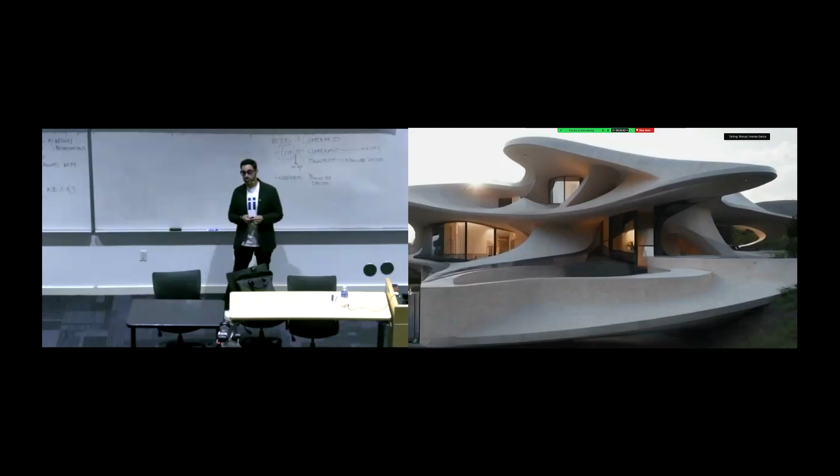Good. Okay, so I'm gonna start back in the 2000s when Greg Lynn, followed by others, started to talk about digital architecture, an architecture that could be organic, that could be controlled by other factors, that could be constantly evolving. Just 1 second. In these 25 years, a lot happened, and we evolved in parametricism, in digital design, in digital fabrication, etc. Up to the point that we have generated enough data on what we call digital architecture that right now we can ask Runway to interpret what the embryological house by Greg Lynn would be if made today. And it can already get a pretty good approximation of how it would look.

I would like to select a few slices of the people that, at least for my own research, have been fundamental during these 25 years, and perhaps even longer. Perhaps it starts with rethinking the way we design with visionary designers like Joe Colombo or Luigi Colani, and how these forms and textures and this way of understanding design and architecture have evolved with the introduction of digital fabrication, robotics, automation, and 3D printing. With special attention to these two people, Miguel Fisac and Jean Prouvé, who understood architecture differently.

They understood architecture as a product, and they wanted to take every single step in the design to production chain. So they were not only designing, but also conceiving those pieces as something that they could fabricate. They would set up factories for it. They would even be in charge of the logistics and the operations behind selling an object that could become a piece of architecture like this Maison Tropicale. They were relying, though, on centralized manufacturing and long-range shipping. What if they lived today?

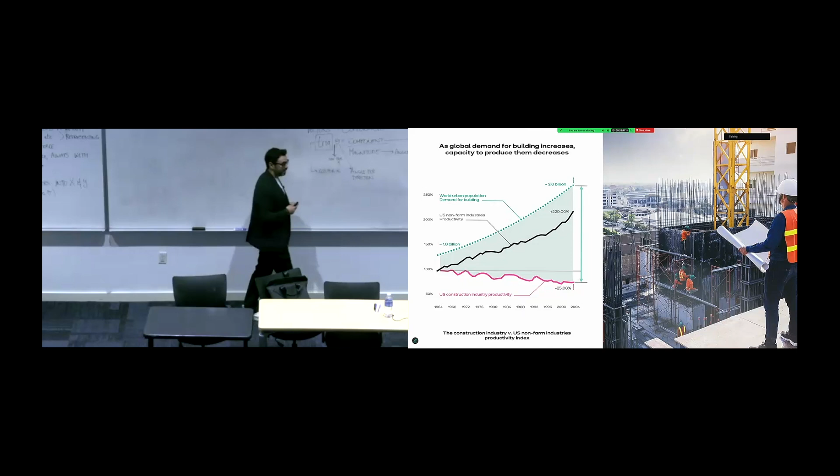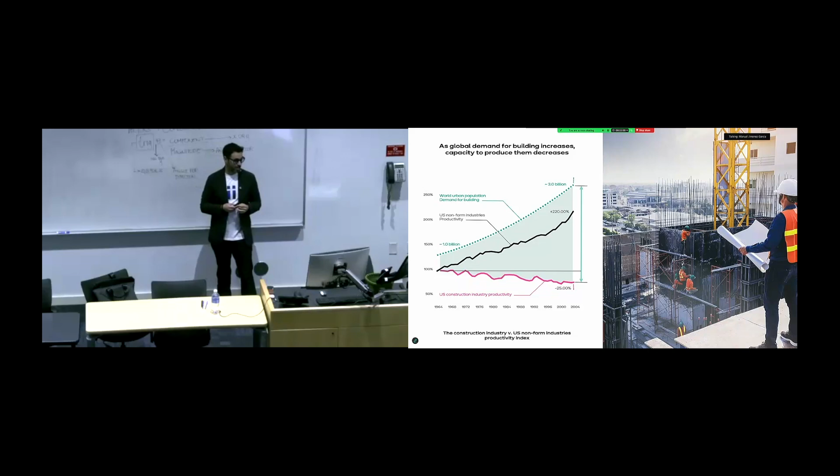You see in this graph the digitalization of different disciplines. In fact, it's not in this one, but construction and architecture is one of the least digitized industries, right after hunting and agriculture. I don't think they are taking into account agriculture in the East because it's highly digitized, and obviously it would not be fun to digitize hunting. At the same time, we urgently need to produce more and more housing to house an ever-growing population. And our productivity is magically going down. That's the curve that you see, the pink one.

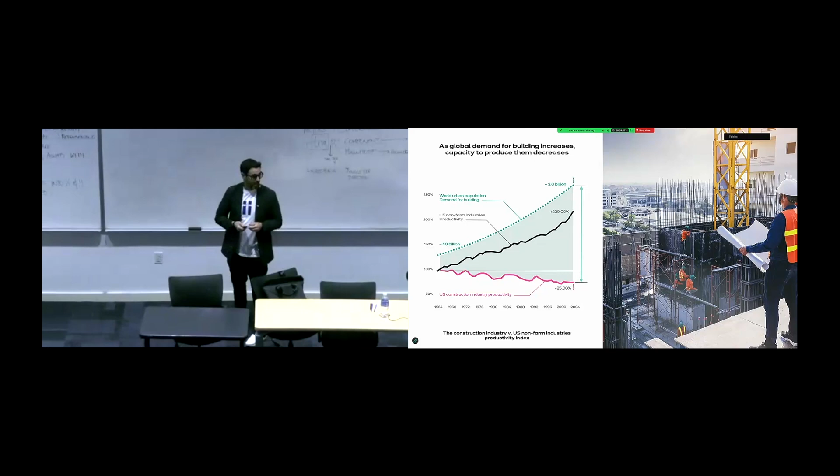Architecture and construction is still an incredibly long and wasteful process. So how can we rethink that? And perhaps we've been rethinking everything we do, right? With every tool that was in hands at that time. Now we're talking a lot about AI and robots taking jobs, etc.

What we consider the first robot, and this is how we frame it in the book I co-edited with Molly Claypool, Vicente Soler, and Gilles Retsin, Robotic Building. The very first robot we had was the washing machine. The washing machine saved us from going to the river to wash clothes, right? As AutoCAD and other digital tools saved us from drawing by hand and repeating the shape of a column over and over again. So how can we use the tools we have today to increase the level of the work that we do, to make design that we couldn't make before?

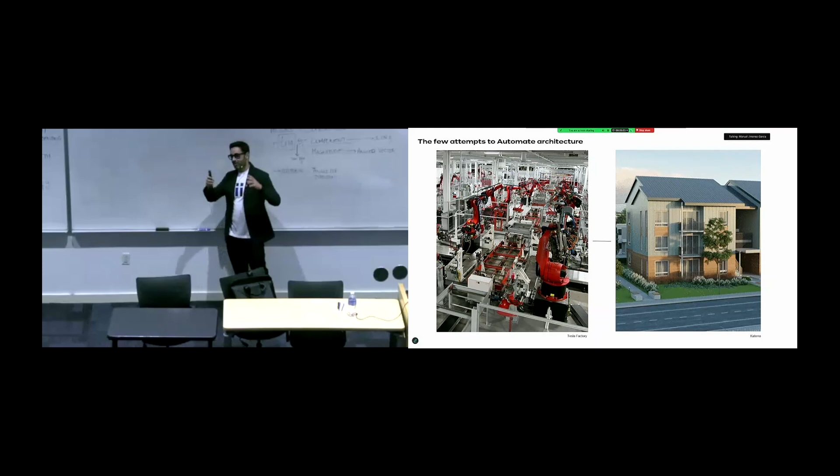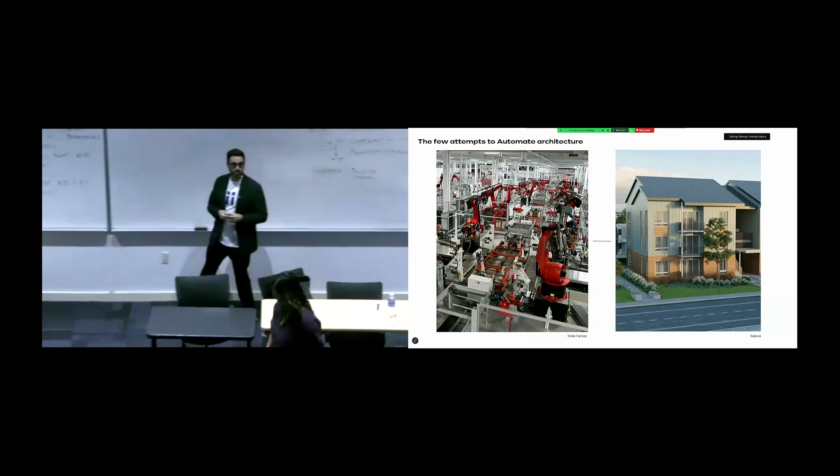And one of the most prominent examples, which is actually shocking, of highly digitized or automated architecture was this company, Katerra, right? So while we have robots in car factories to speed up production, to decrease production costs, to accelerate that process, the closest example of automated buildings is this one that looks exactly the same as any American house. So perhaps we didn't reconceptualize what architecture should look like if it's made from and for the tools that we have in hands today.

In parallel, we've been going through 25 years of experimentation in universities, academic environments, research labs, and so on, on how to use robots and automation to make architecture not only faster and cheaper to build, but also make an architecture that was not possible to see and build before, right? And that's what we've been doing at the lab at the Bartlett for the last 10 or 15 years until we just closed it. But it's actually a labor, a process of automating construction step by step, and in those steps, introducing something new, something that you couldn't do before having automation.

In fact, if we talk about 3D printing, and that will be the focus of the lecture today, we need to come back to 1939, when this guy invented a machine, obviously with the help of a human, to deposit material layer by layer, already at construction scale. What is the difference with what we are doing today with 3D printing concrete? Actually, not that much. We are automating a process and designing objects that could take advantage of that automation, right?

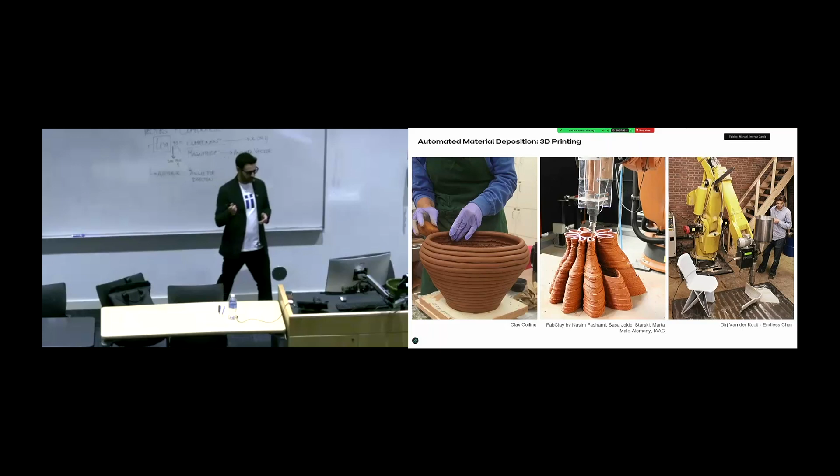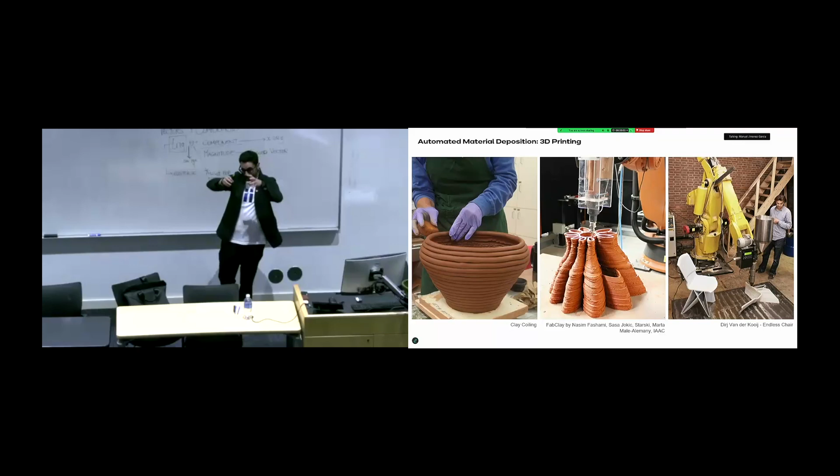In fact, we see it also in other materials. Some of the very early examples of 3D printing in clay really look like something that we were doing before, right? So between pottery and 3D printing, there are, of course, many steps, but it's essentially an understanding of an object that can be built layer by layer. And so what would be the shift?

I'm going to talk here not only about design, but also about what it takes for 3D printing to really enter the design market and the construction market. We actually have 3D printed buildings today in concrete, and that's a different topic, perhaps for another lecture. But why are we not taking plastic 3D printing to buildings yet? It's because we need to create an industry for it. So it's not only about design, but also about reconceptualizing the way we work as designers and makers. And that was the idea behind creating a design brand, and I'm calling it a design brand before 3D printing for a reason that I will tap more into later.

Nagami, right? So Nagami aims to not only offer a way of using the advantages of 3D printing for personalization, for creating forms and shapes that were not possible before, for working with a sustainable material with recycled plastics, for giving a different speed to construction, but also to get all that and bring it to a real market. And our journey for the last few years has been not only about finding the right process, the right design, the right printing quality or technology, but also how this could become real. And to become real, you should be able to sell it, and people should be able to buy it, right?

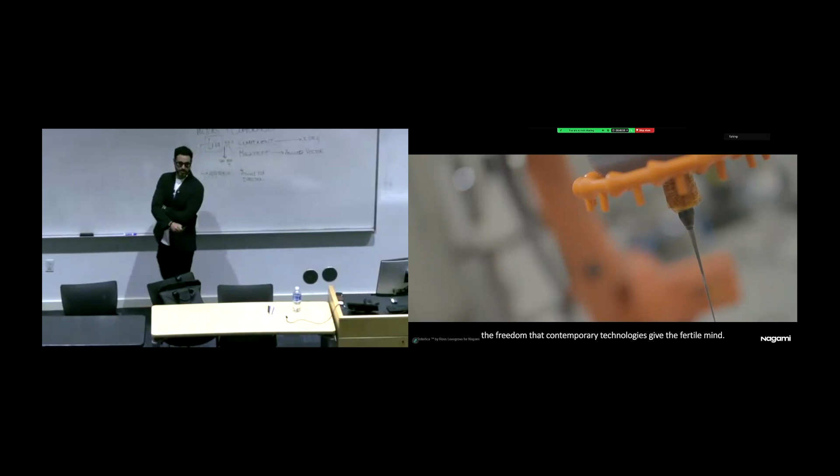When you're faced with something like that, remember these are forms that in the past maybe you could draw, but you certainly couldn't make, unless you had somebody spending weeks doing it. So I think we shouldn't underestimate the freedom that contemporary technologies give the fertile mind.

But you need both, you know, you need the design mind that just kind of cleans things up, and then you need this other algorithmic mind, the one that can step in and understand the complexity of mathematics. You're building in thin air without a mold. And I'd like to bring in new species, new things that people have never seen before. Now is that moment, right?

Well, I think Ross explains it fantastically well. It's really about design and technology together, right? So you need to think from a design perspective and from a technology perspective to create something that is making the best use of this tool, or perhaps opening up to new tools to be developed.

Like that's what happened with the Zaha Hadid Architects chairs that we built before. This is printed in a transparent body to then be scanned and then printed over in a different direction. So we were really creating bits and pieces of software that would allow us to materialize these chairs. And in here, I think Patrik will talk about it.

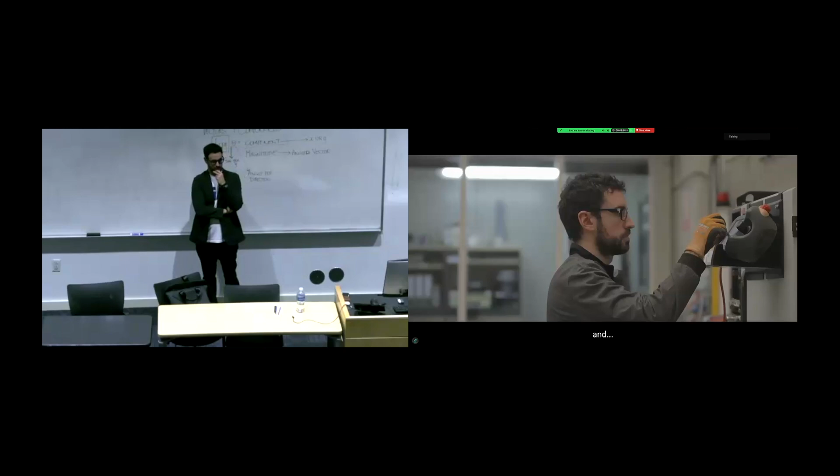Well, I think these techniques are part of the computational revolution in civilization. And what I like in particular about 3D printing, it seems to be less constrained, particularly with respect to intricacy and three-dimensional complexity. And what it adds to this is versatility and variation. So I think in our designs for Nagami, we're trying to show that potential.

There are various layers of printing, and lines drawn down the surface are printed over lines which are more normal, the usual contour lines which are running from the bottom up. And I think it's great that Nagami is bringing characters like us and Ross and Daniel Widrig into this, and I'm sure there will be others lining up to join.

Well, for developing these 4 chairs that we did back in 2018, we had to develop a few special tools. One is to get rid of this idea of 3D printing as being horizontal slicing, and really take advantage of all the axes of the robot, right? How can we start printing with a different choreography, tilting the extruder to achieve non-parallel lines that would allow us to have different forms in the object? So break up with that idea of horizontality.

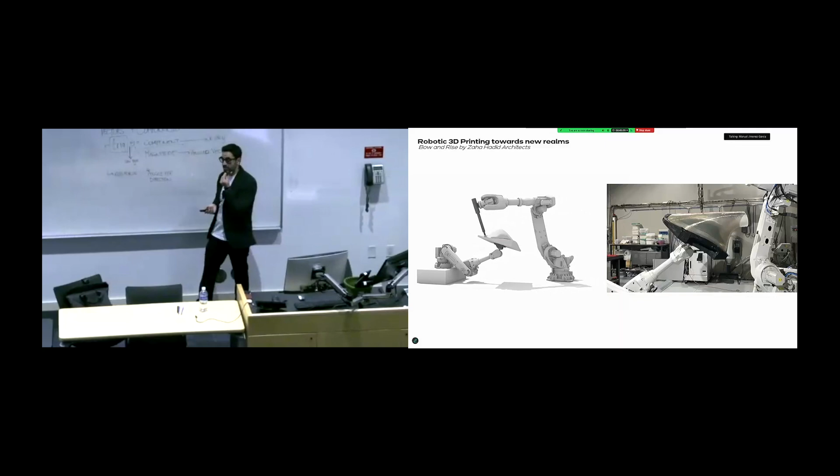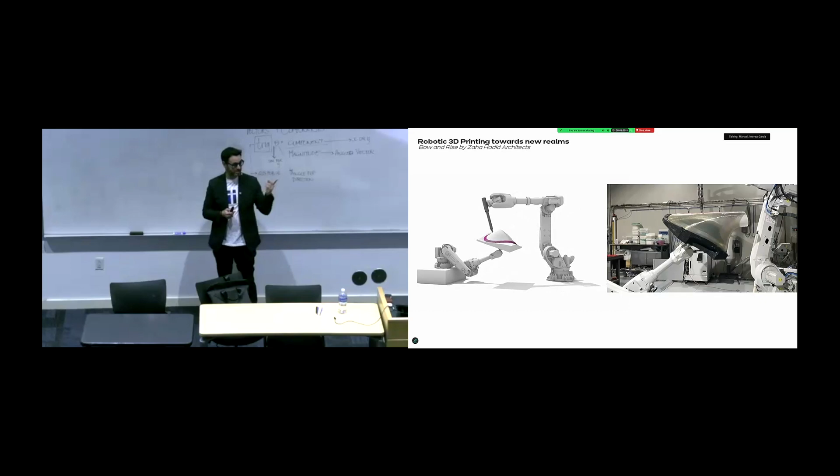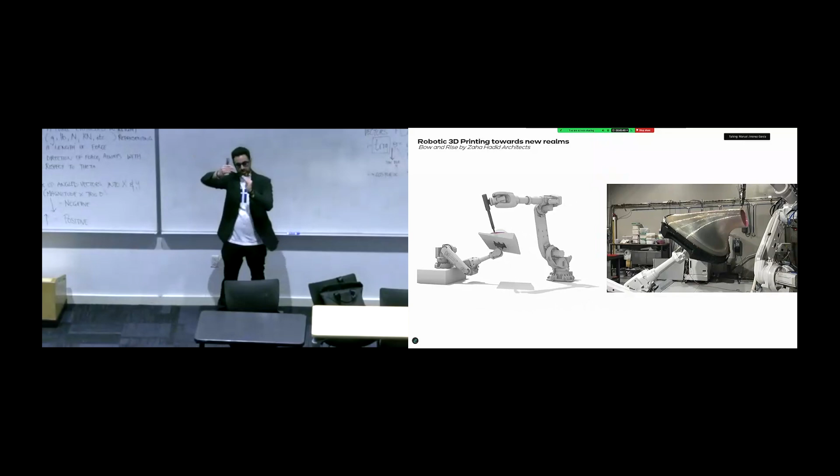How can we push the maximum dimensions and the movement of this robot to create an object that wouldn't be conceivable otherwise, and how can we push that further to basically balance out gravity, right? So in this case, we have 2 robots. Here you see the video. 2 robots working in multi-move. One is moving the mold, and the other one is moving the extruder. So essentially, you can print way deeper angles than with conventional methods.

But the most important part for us, and that was a key milestone in our journey, was to make all this accessible. Those 4 chairs were still developed as a cornerstone, as an art piece, 20,000 euros each. But that really forced us to develop the technology, to then apply that technology in way more accessible objects. So the goal was actually not to create only art pieces, but to compete in a real market for design chairs, such as with these ones that are just about 500 euros.

They are a bit more expensive in America, yeah? So that you know. I'm sorry.

Shipping and all that. So we started developing a catalog of products, from chairs to vases to lamps, etc. Really exploring different surface qualities that we can achieve that are extremely connected to this technique, that are not present in more traditional manufacturing methods.

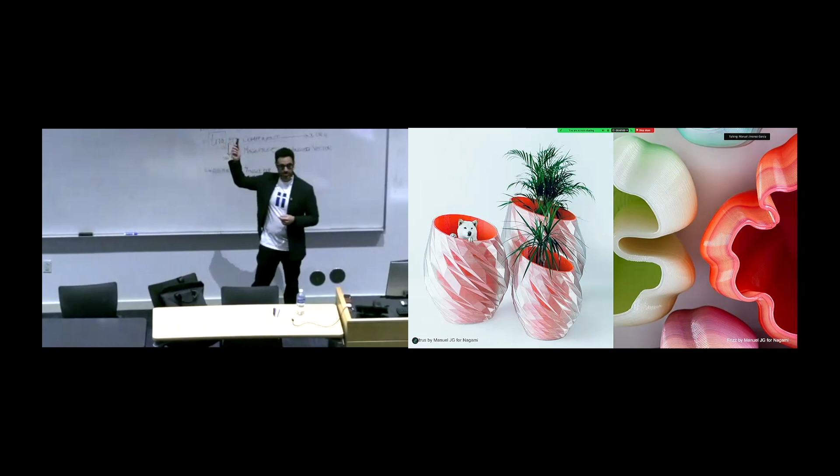That's my dog. That's the most beautiful part of the presentation, of course. Not 3D printed.

Having different textures, from micro textures to then organic kind of displacement of the shape that conforms the chair, to robots working collaboratively. In this case, this is a beer draft, and one robot is printing the object, and the other robot is mechanizing the parts where you would get the rest of the mechanical parts of the beer draft.

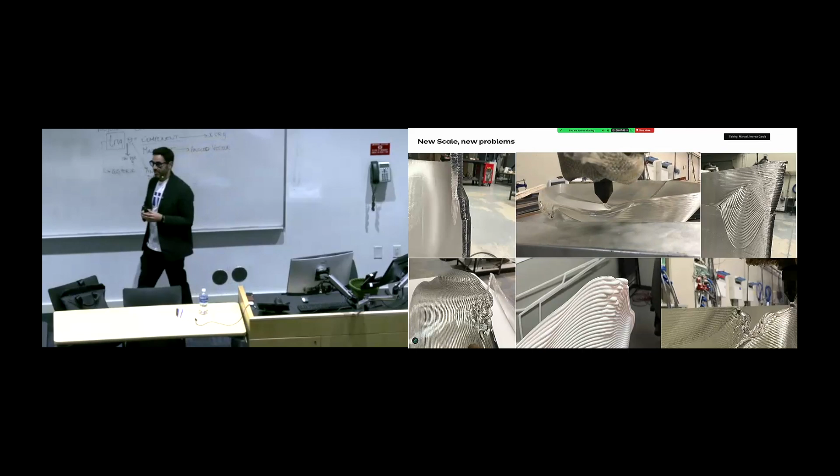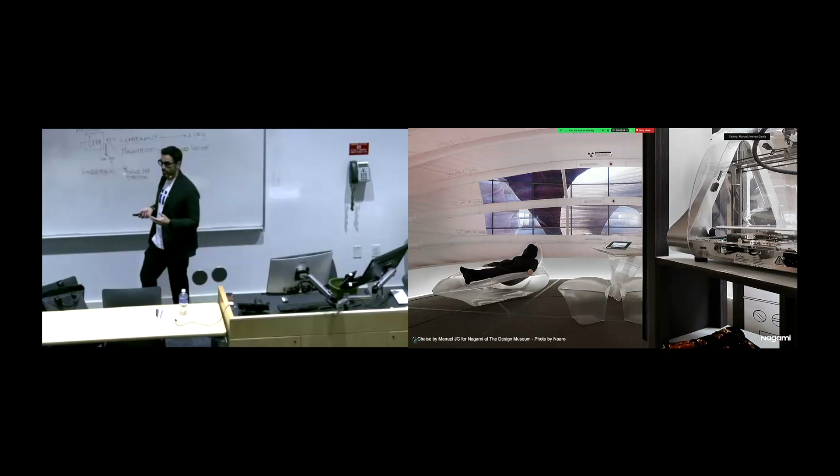But in reality, I mean, those pictures are great and beautiful, and they look amazing in Instagram, but this is our everyday. Yeah? So 3D printing is really, really far from the magic of the print button, right? And especially at this scale. Perhaps at a small scale it's true, and 3D printing is a service. At a large scale, it's not. You really need to learn not only the opportunities of 3D printing, but also the restrictions. Because those restrictions will make the stuff that you design possible or impossible, or even worse, close to impossible, meaning too expensive to make, and therefore too difficult to sell, and therefore it's not going to make an impact in a real market.

So for an object pretty difficult to build, like this one, this will be kind of middle ground, borderline. We required 15 prototypes, almost 500 kilos of plastic, 300 printing hours, and 3 months of rationalization of engineering, right? So even if the promise of 3D printing is, oh yeah, we can create every piece different, these are the implications of making every piece different. And I'm going to explain that in a bit more detail in the following slides. But to avoid this piece costing 25K, we need to make sacrifices on the design so that it doesn't require so many prototypes, or obviously make a lot of them so we can offset that initial cost.

That brings us to a more conceptual question on where we think 3D printing navigates within the domain of design and architecture. 3D printing has normally been associated with parametricism, right? We can make every single piece different. And at the scale of the object, that might be right. At a large scale, it really isn't. Because that means that these printing errors, these headaches, will multiply by the number of pieces. And therefore, prototyping time will be way longer than production time. And this is really the opposite of mass manufacturing, right? Of the Henry Ford assembly chain.

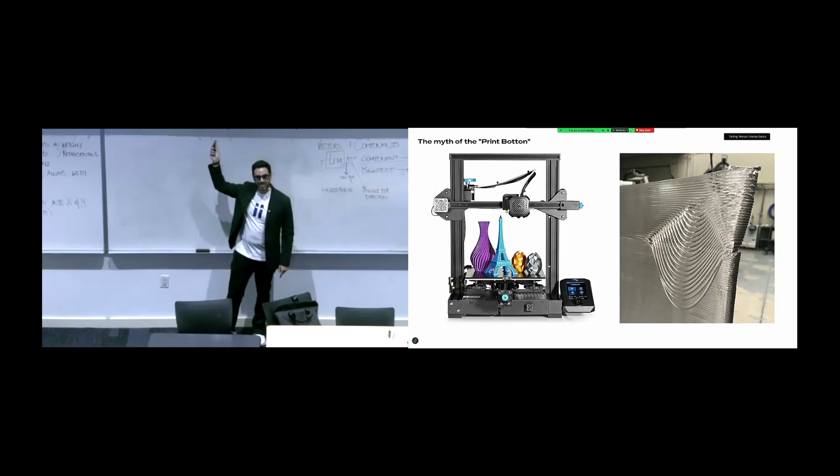And one of them is serializing errors. If you guys have 3D printed something, that probably most of you have, you probably went through that night when you left the machine printing a 30-hour object, and then at the very end, it broke, right? So if that happens at an industrial level, we lose a lot of money and time, right? So one of the possible approaches is serializing errors.

In these projects that you see here, the very first one we started with the lab at the Bartlett, we are prototyping only one line fragment. So the whole object is a combination of that line fragment to create a continuous line that will be printable by the robot. However, if we've tested that line in every single position, every single rotation, we know that the totality of the object will be printable.

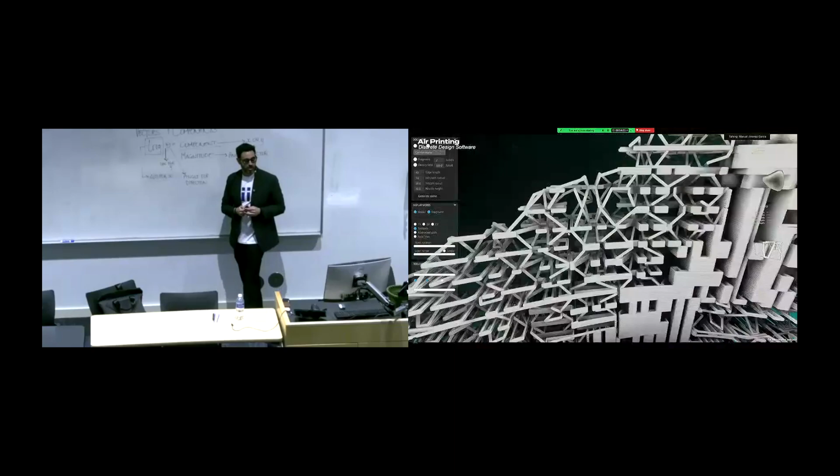And we created a software that would arrange this line that would be previously prototyped into creating a 2.4 kilometer long continuous line that we would know will be printable with a robot. In fact, that chair took 3 weeks to print with a robot completely autonomously. And we knew, because we prototyped that line fragment before, that every single part of that object will be printed successfully, right? And this is, for us, a very interesting milestone in the use of this technology.

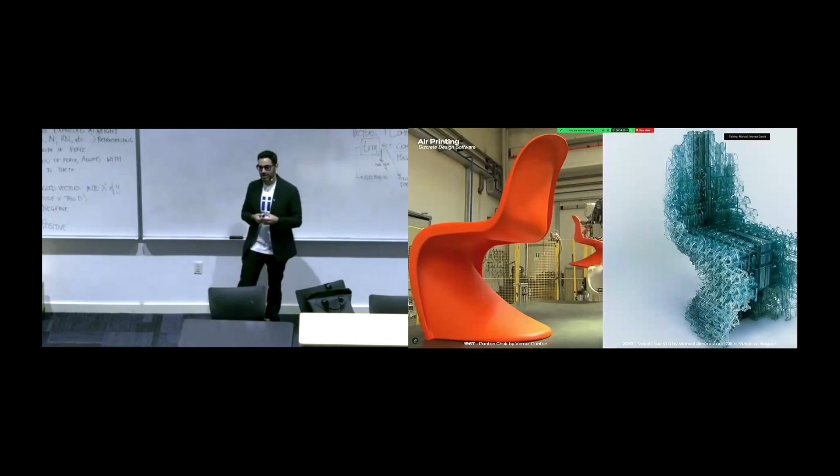This chair, as many of you already appreciated, is a version of the Panton chair. The Panton chair is the world's first plastic molded chair. And this is really taking that shape and making a new version of how we could conceive an object like that with a technology that didn't exist before, right? That really doesn't operate with surfaces and molding and demolding anymore, but it operates in volumes. And in fact, we created around 24 different versions of this chair, programmed within that software that we built.

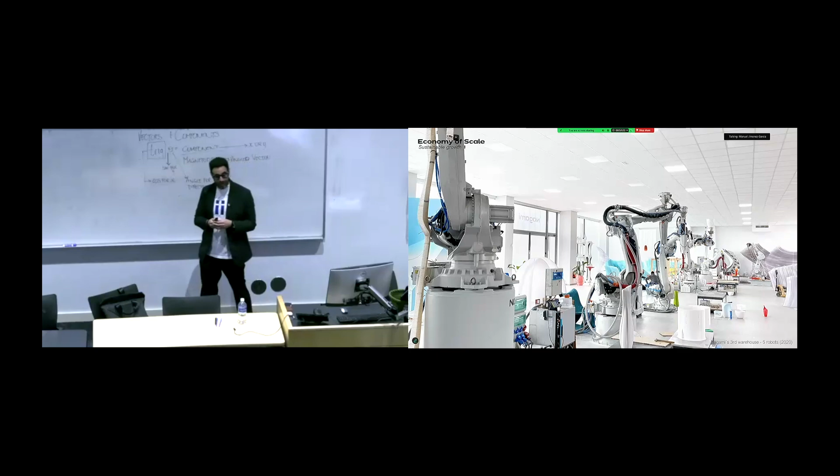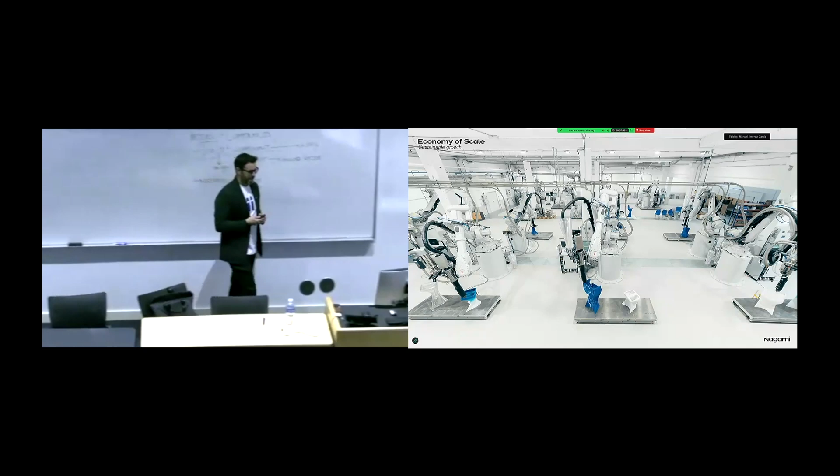Then we moved to a 3-robot facility in 2019. Then later on to 6 robots during COVID. And now we just got another 16. So we have 21 robots 3D printing, hopefully very soon 24 hours. Right now they are printing around 12. But that really changes the game. First, you need to automate the process much more. This has automatic feeding and all the kind of technological advances that would make this work way more smoothly, right? But also this allows you to take on all the projects that you couldn't access before.

Like when Dior asked us to dress their shops for the new collection. When a fashion brand launches a collection, they normally do a branding experience in all their shops for 6 months, and then they throw it away, right? So we were basically jumping in to offer a design personalized for them, and then 6 months later, take the plastic and recycle it. But back in the days, we couldn't access more than 3 shops, right?

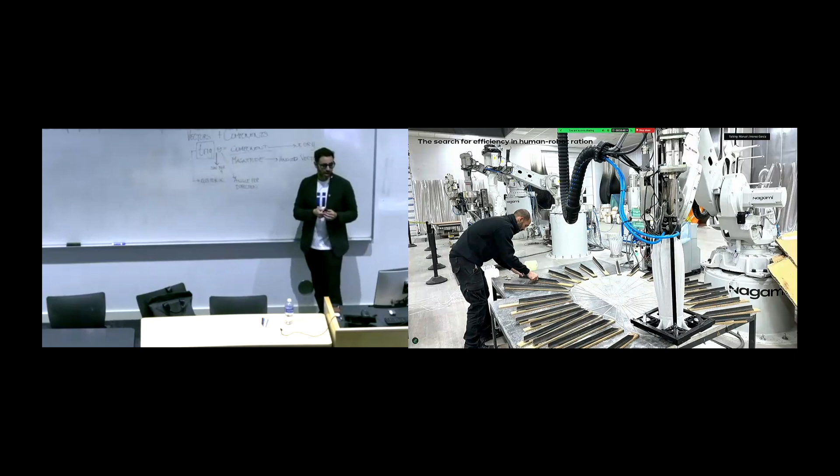Today, we can take on way larger projects. Like this one, which is a 25 meter long ceiling in Caixa Forum, in the Calatrava building in Valencia. But to really make it efficient, we need to always search for the right equilibrium between humans and robots.

And that is continuously changing, right? So with Elon Musk robots now, it's probably going to start leaning more towards robots. But 3D printing, again, is not yet a push of a button, and sometimes it requires human intervention. So how can you make a business plan that makes you scale that production efficiently?

And we made this growth based on a project that was clearly just designed for 3D printing. We couldn't do this project with any other technology. That was 80,000 seats for Santiago Bernabeu Stadium. Not the seats for the new stadium. We were taking the old seats and transforming them into chairs, bar stools, etc., so that fans could actually take one home. We made the entire process, and then we did machine learning for classifying all the seats. So actually, you can buy the seat where you've been sitting for decades and decades.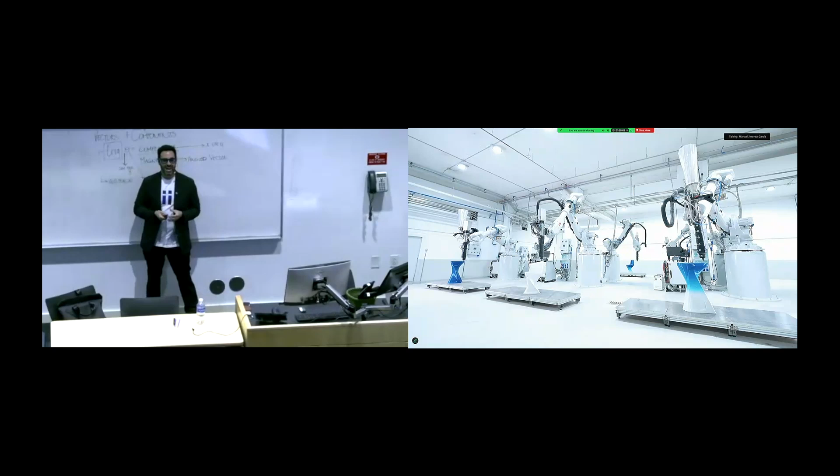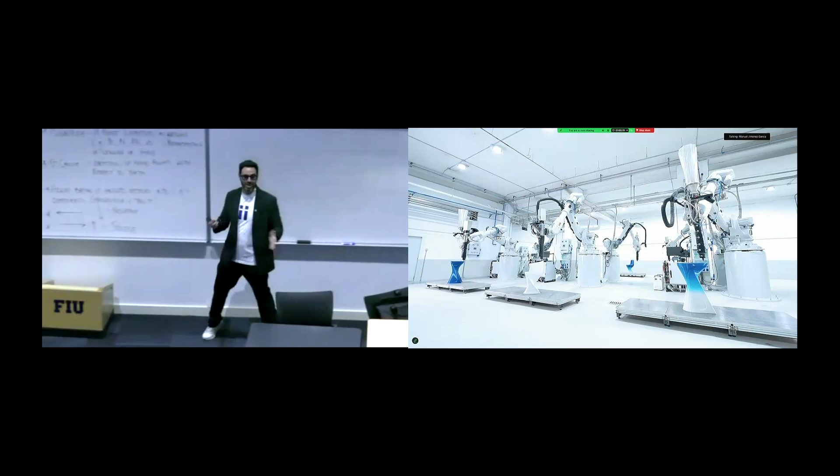And it was a total mess. It was very difficult. Think about it, it's 80,000 pieces. No one has ever printed 80,000 pieces. So we basically jumped into the pool and said, well, we can take it. And we encountered millions of problems on the way. But we thought that 3D printing was the tool that could make this possible, that the robot wouldn't mind to print one piece right now and then a completely different piece later. No, the robot doesn't. But the guy who is managing it does, right? And that really leads to a scaling up of production costs.

So we decided in a second phase to really fine-tune this thin line between personalization, pushing 3D printing to the limit, and mass manufacturing. And that's where we think this is becoming incredibly interesting. So what is the right equation? Is 3D printing great to make every single piece different? Is 3D printing great to compete with mass manufacturing? Perhaps the answer is still not there, and it's not A or B. And we have a further question: is 3D printing more efficient in products or in projects? So now we're in the process of analyzing how much it would take to create a new product or a new project.

And we're launching a catalog, but it's a flexible catalog. That's, again, something you couldn't do with another technology. It's a catalog of pieces that you can still personalize, but within a range, and that you can show to someone who says, well, I really like that chair, but I'm building a theater, like in this case in Ibiza. I need only 250 chairs, then 250 stools, 100 tables of this type, 100 of this other. Obviously, no one could do that. There is no technology that would do that at an affordable price.

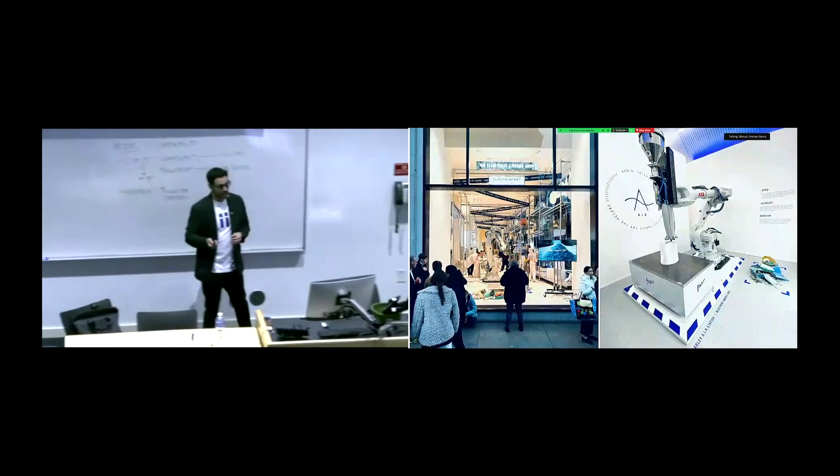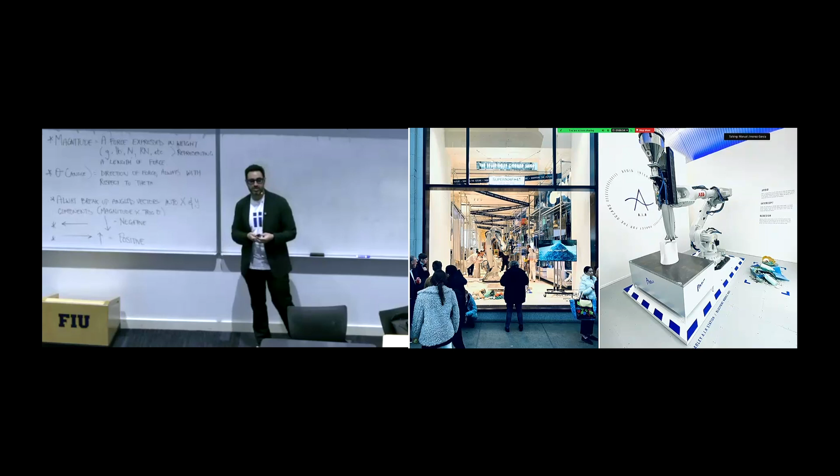However, in the 90s, we were aware that plastic would be with us forever, and that is what really stopped using this material for architecture. In fact, right now there is 8 times more weight on the planet in plastic than in people. So each of us has a plastic footprint of 650 kilos, which is pretty insane. So what if we could use distributed manufacturing to really increase the speed of recycling this material? If this really starts entering the domain of architecture and construction, that is where the real mass of material comes into play. Not with fashion, not with small household items, but with architectural elements.

And that's something that we're investigating in larger scale projects that are trying to pursue this idea of modular 3D printing. Modular, but in brackets. Because if you coin that term at the beginning, it doesn't make any sense. Why 3D printing modular? You can make every piece different. But actually, there are spaces in which 3D printing is incredibly optimal. For example, if you take a single building that has a huge collection of panels, those panels are not going to be a product in the market. They are going to be just part of that single architectural piece.

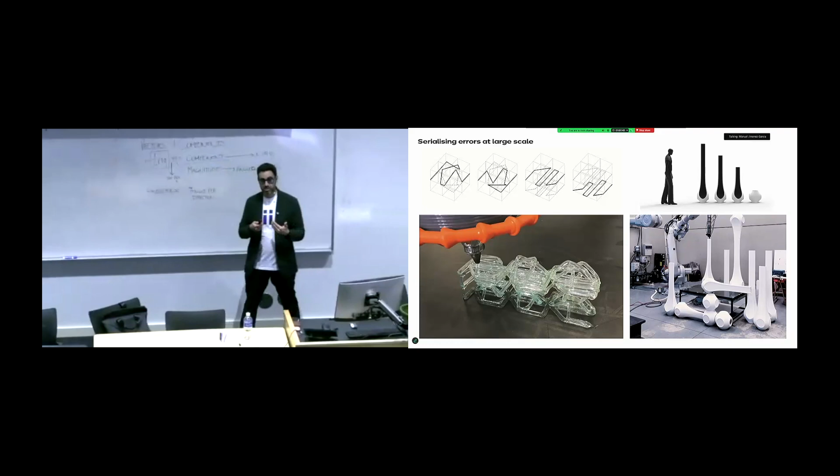So we're taking this concept of modular 3D printing at a micro level and pushing it into larger levels. So how can we create a piece where we can alter the height of it? We can have different modules. We can alternate or alter the type of the piece that we build. But we always keep a connection strategy. So it's semi-modular, semi-flexible.

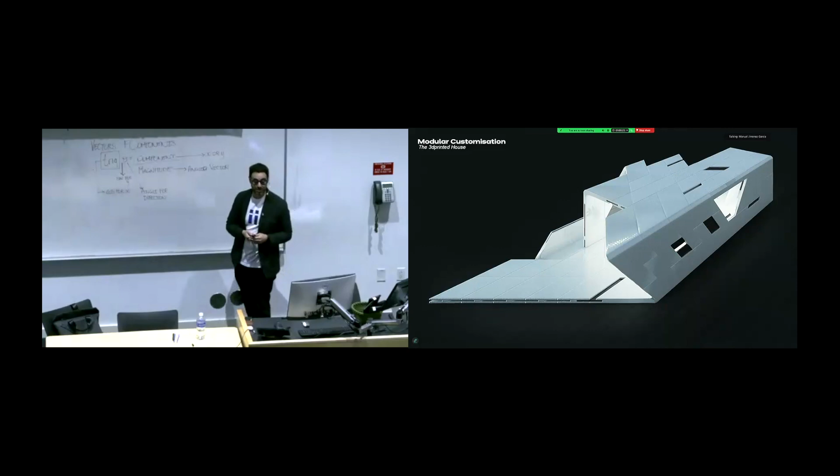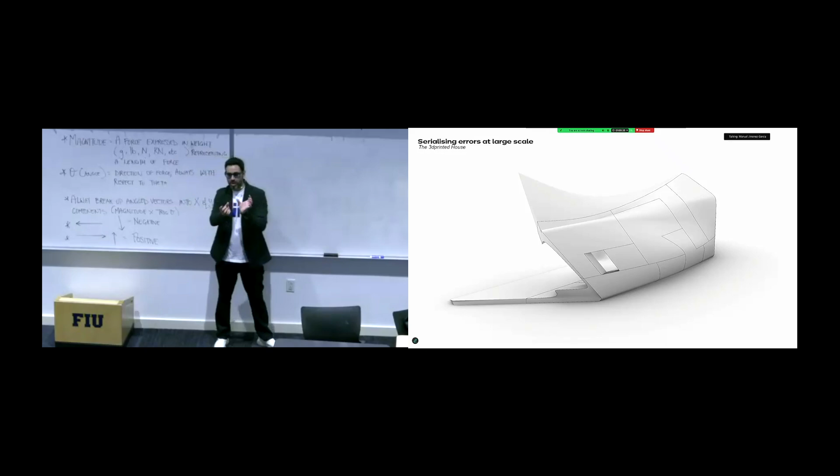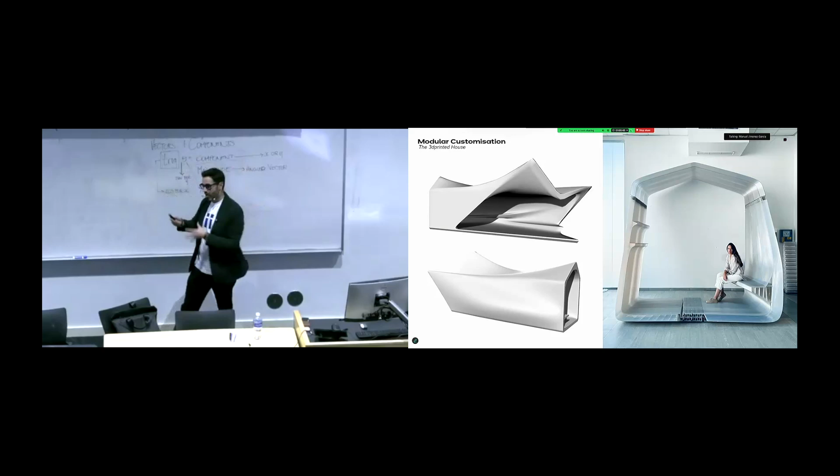We're exploring that in a project that I can't show right now, but this is a massive 3D printing project, and hopefully very soon also in a housing project where the concept of modularity is really changing. Modularity doesn't mean the exact same objects anymore, but the same strategy. It means a connection that we know between one piece and another, but the pieces are still customizable. Someone can still say, I want a shelf here, or I want a higher roof, or I want a seating area. So modular architecture really starts to be reconceptualized.

And for that, we need to also be able to print larger and larger pieces. As I mentioned before, we started with chairs. This is an incredibly architectural example of researching something new. Most of the seminal architects have done seminal chairs just for testing new ideas that they would then rethink at an architectural scale. And that's how we were doing it back in 2019, with a process that would take us to print up to 3.5 meters tall in just 48 hours, like we used for this piece designed for Rose Grove.

Or how can we grow larger? This is a sculpture with ecoLogicStudio that reaches 12 meters. So how can we make large pieces that still connect with one another to create a way more vertical piece? Or this one with Nicolo Casas, who used to teach here, with Nicolo Casas and Parley for the Oceans. Again, 3.5 meters. And we also start checking different constraints that we learn in the process and incorporate into our notebook of possible problems.

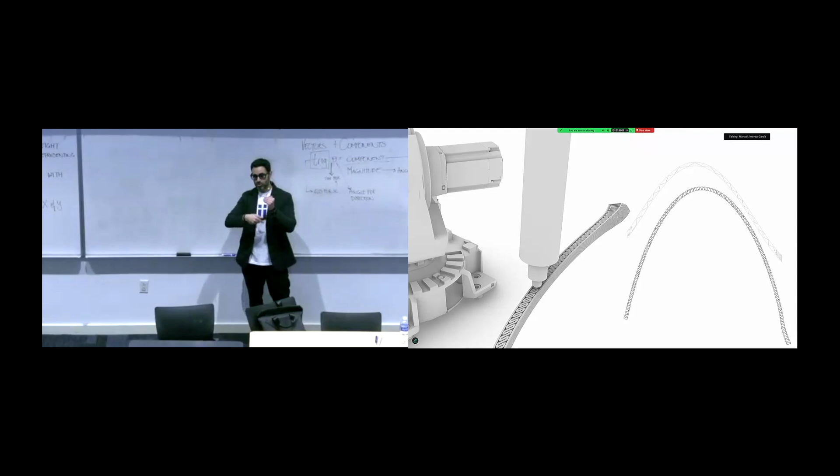If you want to do an incredibly flat facade, right? Or you need to reinforce those parts, right? So actually printing flat, again, needs more layers, needs more material than printing something organic. And we start to control that and parametricize it, right? And the same surface can be filled with more or less material in the same print.

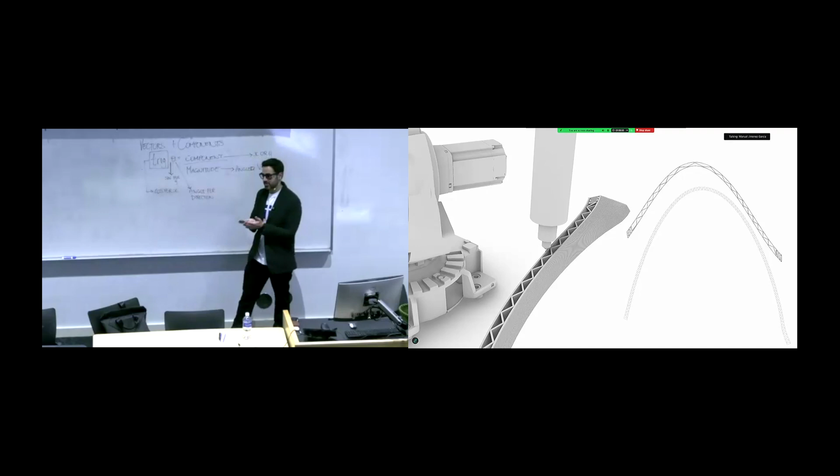For example, to make this pavilion, we were not only optimizing for structural optimization, as you see here, but also for printability optimization. So we have new terms coming into play that come from your experience developing these tools and testing them out. How the way you are folding the lines start to make more rigid a part of the structure while keeping some of the flexibility of the material.

This is how we test chairs, sometimes if we don't have time to send to laboratory. This is 250 kilos in flexion. And that same concept we apply to larger architectural pieces, as you see here, for this pavilion that we built in the Netherlands, right?

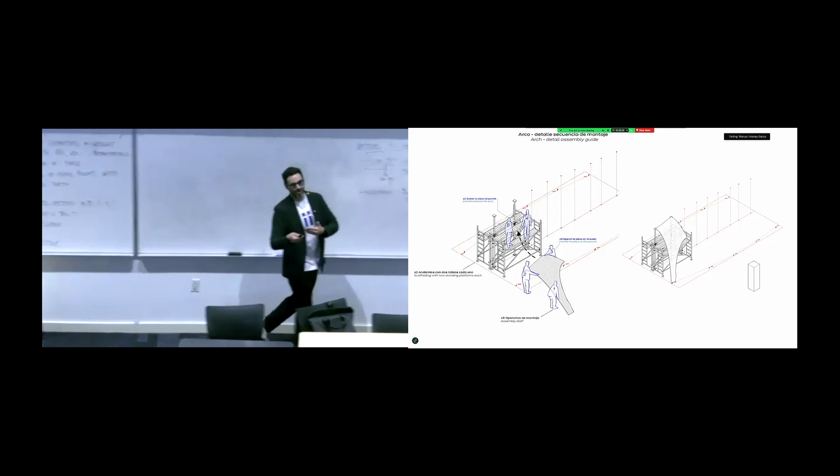What is the most efficient way of dividing this into different pieces? What would be the way to install them and make them working as a whole, right? So this is an entire process that becomes part of our catalog of possible 3D printing solutions to rethink architectural elements, right?

Connections, right? Now we're printing a lot of facade or interior panels, and you can actually hide the connections because the machine can print concave and convex shapes at the same time, something that you couldn't do with plastic molding, right? So how can this be taken forward to create fully continuous surfaces like that 9-meter interior panel?

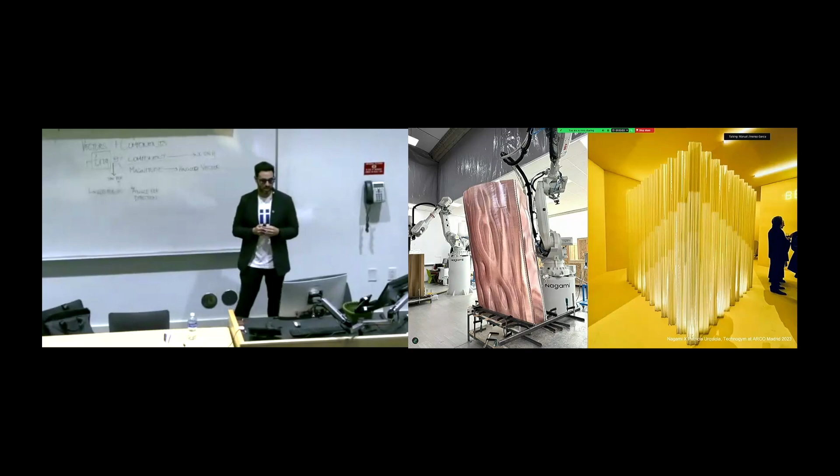Different finishes, right? Different ways of working with lighting. As we see here, this is a Garcia shop in Milan. Different ways of connecting panels, and different ways of understanding concepts coming from the client, coming from collaborators. This is a Spanish brand that is only purely based on recycled and sustainable materials. So everything they do is 100% recycled.

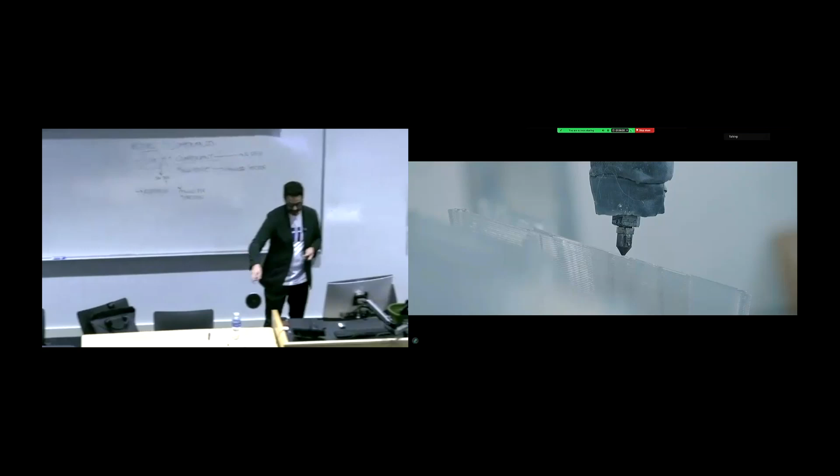They wanted to recreate the feeling that you will have when you inhabit a glacier that is melting and cracking because of climate change. So we started having discussions and references on that kind of circumstances in the environment and how we could recreate it with a design that would come from casualty. I think that's taking too long, so I show you the pictures directly. That's also in Madrid.

So that brings us to, well, almost the last chapter, that is, again, the opportunities that we have to reimagine. Perhaps it's not reimagining architecture, but reimagining building elements, right? And which ones are worth redesigning and which ones don't.

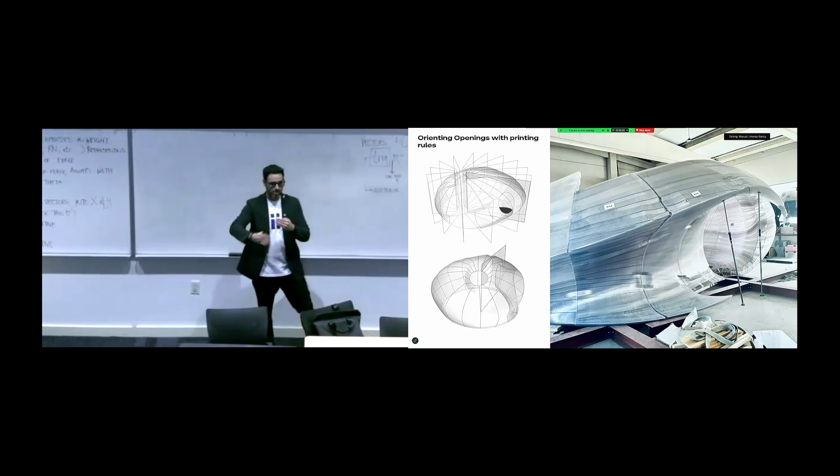So all of these experiments that we've been doing in multiple scales meet together into an entirely 3D printed building, which is a pavilion that is currently in process, where we're exhibiting, for example, this non-planar slicing that we did with the Zaha chairs, right? And that allows us to cut this building into pizza slices. What would be the best way to enter such a building? And in this case, it's aligning it with a printing bed, with that flat surface that we always need.

So we're really reconceptualizing the way we treat a structure, right? So rather than multiple layers, we have a volume that becomes denser or lighter. That becomes something that is fully controllable in different parts of the object, right? How can we connect pieces together?

In this case, for this connection direction, we're conceiving the pieces, including the facade, as building blocks. This is almost like a Lego for grown-ups, so that you can actually slide one into another with a male-female connection. This is a further evolution where we are detaching the facade and then making it, again, with a different material.

How can we make objects that move, right? Like perhaps those parts of architecture that we never think of, like doors, right? Or what you have in the image on the right is a door handle, right?

Our approach to waste, both human and artificial, has a profound impact on the future of humanity and our planet. 1/3 of the world's population still lives without basic and safe access to sanitation, while plastic keeps on filling our oceans and our landfills. So how can you transform it into... The 3D printed toilet front has been an incredible challenge for us. It is printed out of 100% recycled materials.

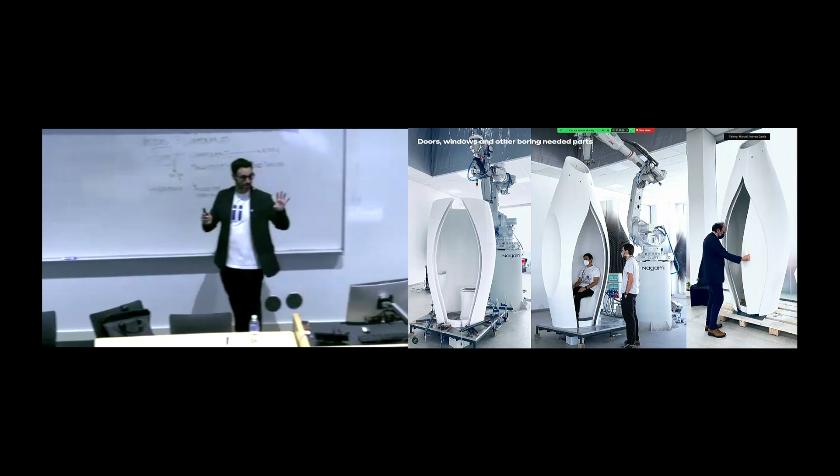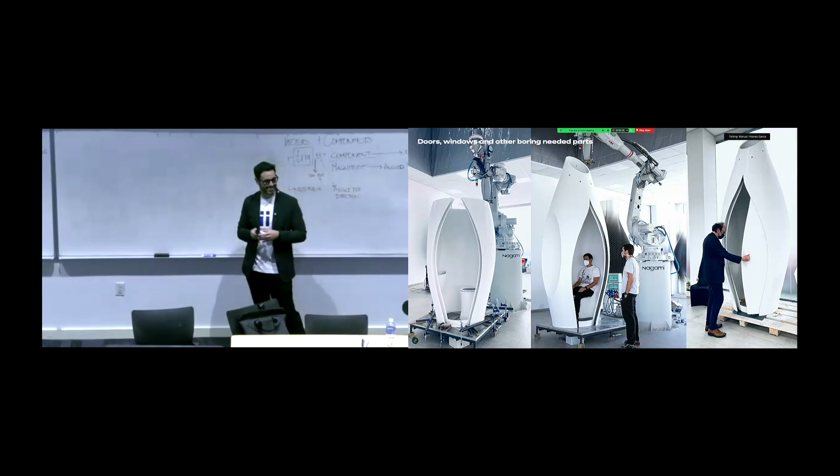So this is, again, I really think, I've been looking, but I really think this is the world's first plastic 3D printed door. And if not, it's definitely the world's first plastic 3D printed door in Avila. Yeah, that's my hometown. So yeah, again, introducing channels for other pieces that are not printed, or off-the-shelf products, such as the toilet itself. How can we make a smooth process in between the parts that are printed and the parts that probably shouldn't be printed, or shouldn't be printed yet?

And as I was saying before, all these experiences are feeding into this one project, but also into a new part of the company that is fully dedicated to AI, where we are learning from these processes, learning from the mistakes and the opportunities, from the styles, from the finishes, from the way we treat form and texture, and start training models. You probably have done this experiment, or everyone has: design this in a Hadid style or in a Coop Himmelb(l)au style.

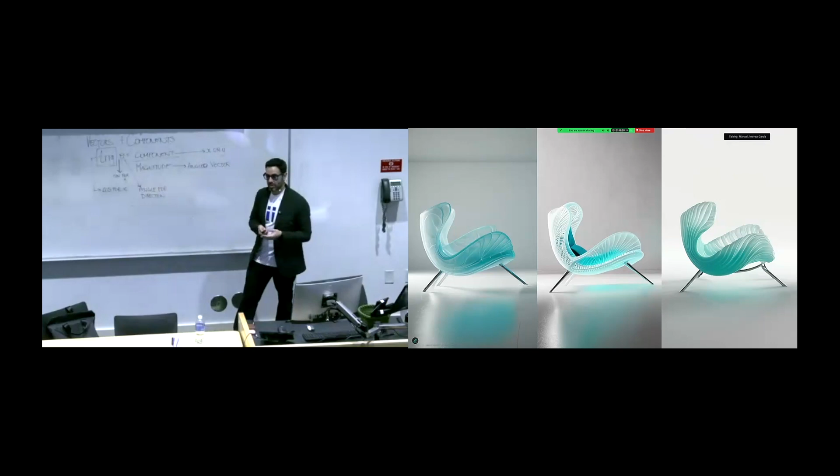So now these models know about Nagami and can actually transform a sketch into a Nagami-style 3D printed chair, and can, of course, start giving more options for these objects and immediately make them 3D. So this is accelerating, obviously, the communication with the design team and with the clients, where we are not just shooting a Midjourney image to a client and then the client getting really disappointed when you develop the project and start realizing that much of that stuff is actually not possible.